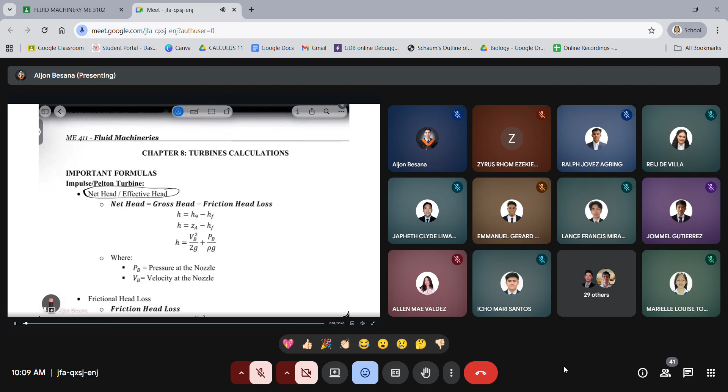For our impulse turbine, we have here our important formulas, just like the net head, the friction head, and the other formulas specifically that we are going to use for impulse turbine. First, let us talk about our net head. When we say net head, it is simply the summation or the totality of all the energy that we can harness. So if the term is the energy that we could harness, it means that it is the total energy minus all the losses. So when we say net head, it is the only energy that we could harness using our turbines. Again, when we are talking about turbines, it is not anymore imparting energy, but it is more on harnessing energy from our fluid.

Okay, so when we say net head, again, that is the totality of head that we can harness or the totality of energy that we can harness from the fluid. So it is simply equal to our gross head minus our frictional head loss. So first, let us define what is gross head. So if you can see here in our diagram, gross head is represented by big letter H with a subscript G.

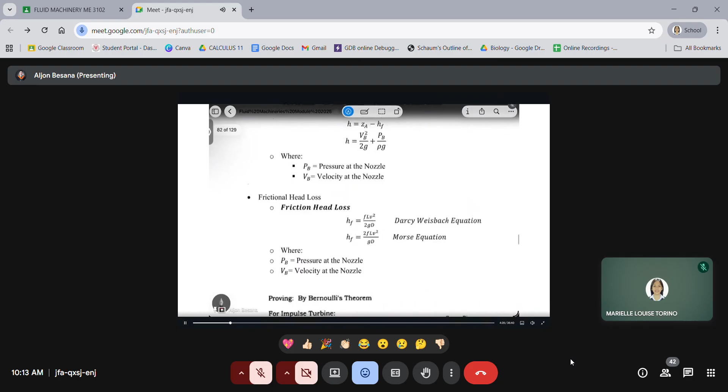So pag sinabi nating friction head, as the water travels from the reservoir down that long pipe, kita nyo tong long pipe, this is what we call our penstock. Pag sinabi po nating penstock, siya po yung nag-guide sa ating fluid towards our turbine. And this penstock, again, is a pipe or a canal or a channel.

And when it is another solid surface having interaction with our fluid, therefore there is a fluid-solid interaction. The surface of the solid is also affecting the flow of our fluid. Friction means it is the resisting force.

Therefore, as the fluid flows through this penstock, meron po tayong nagiging friction or resisting force, and that is considered as losses. So this friction creates the drag and resistance that causes our fluid to lose energy.

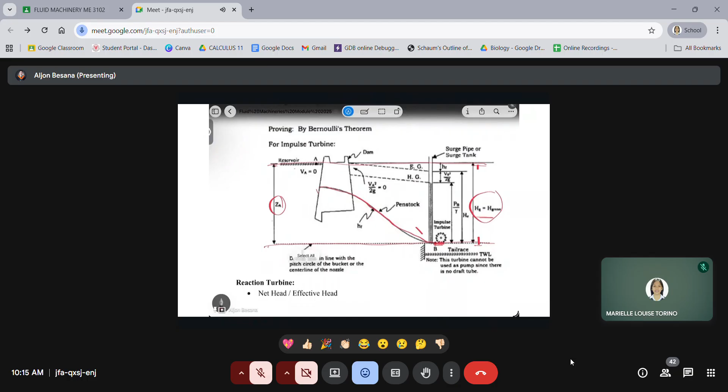Again, katulad ng discussion natin before, we have two formulas. The first one is the Darcy-Weisbach equation and the other one is the Morse equation. Kapag po yan ay less than 2, then let us use the Darcy-Weisbach equation, which is simply HF is equal to FLV squared all over 2GD. Pag ang ating value ng F or yung friction factor natin, ang leading zero niya ay 2 lang po or mas kaunti pa sa 2.

But when the value of the friction factor, the leading zero, is 3 or more, then we are going to use the Morse equation, which we have HF is equal to FLV squared over GD, and the multiplier 2 ay nadoon po sa taas. And what do we call this factor? This is now what we call our fanning friction factor.

Okay? So, continuing. So, we now know the gross head and we now know our frictional head loss. So, what is net head naman po? When we say net head, that is the total energy that can only be harnessed from the fluid. Yan lang yung mismong tubo mo, kumbaga. Yan yung tinubo mo. Yan lamang po. And how do we calculate it? It is simply HNet is equal to our gross head minus our frictional head loss.

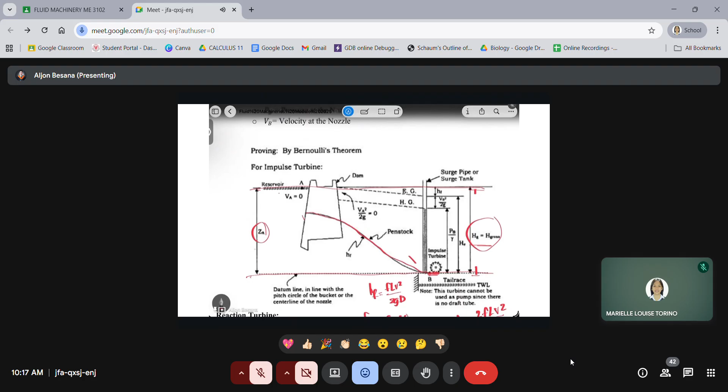But then again, take note, na si HG ay equal daw po kay ZA, di ba, nakita natin doon sa diagram. And going back to our diagram and using our Bernoulli's theorem to prove that our equation is correct. So I have our Bernoulli from our reservoir going to our datum or tail race. So I have ZA plus velocity A squared all over 2G plus pressure A all over gamma is equal to ZB plus velocity B squared all over 2G plus pressure B all over gamma.

First, if you could see on our diagram, the velocity at the reservoir is equal to 0. Oh no, sir. Bakit po? Kasi yung atin pong reservoir is considered an open area or a very large area. Having that very large area, the velocity is considered to be equal to 0 theoretically. Therefore, yung VA squared over 2G natin ay equal kay 0.

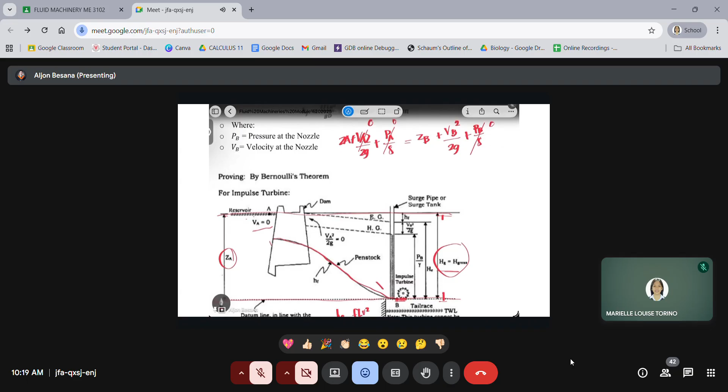Next, we also have our reservoir open to the atmosphere. Ay di ba dapat ang gagamitin natin lagi dito ay gauge pressure? Therefore, ang matitira lang dito ay yung atmospheric pressure or simply ina-assume natin na equal to zero. Kasi may atmospheric pressure din dito and this is also open to the atmosphere, yung PB natin on the other side, kaya naman siya equal din po kay zero.

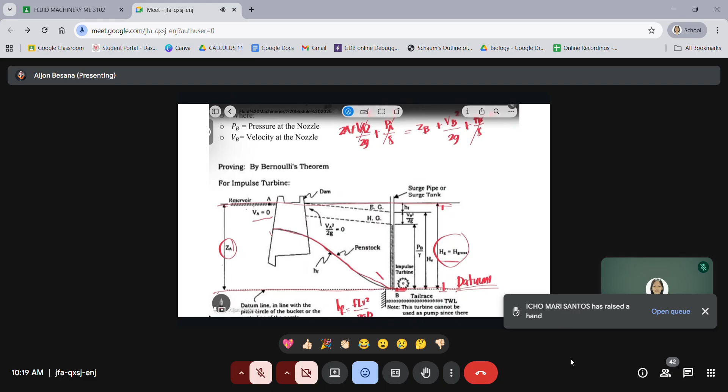Okay? Next po, yung VB natin, that is our tail race... equal to zero. So this is also equal to 0. Ayan. Therefore, yung matitira sa atin ay ZA ay...

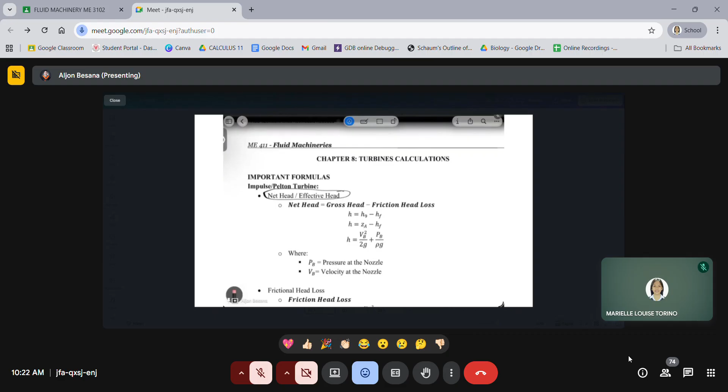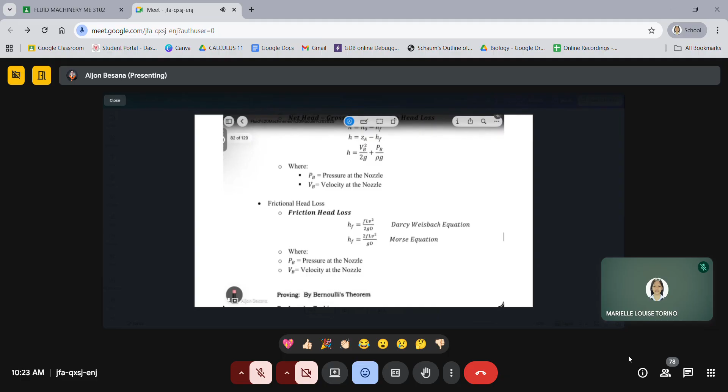So good day everyone. So for today we are going to discuss our chapter number 8, which is turbine calculations. So for our turbine calculations, we have again two types of turbine, our impulse or Pelton turbine and our reaction, or could be called Francis or Kaplan turbine. For our impulse turbine, we have here our important formulas just like the net head, the friction head, and the other formulas specifically that we are going to use for impulse turbine.

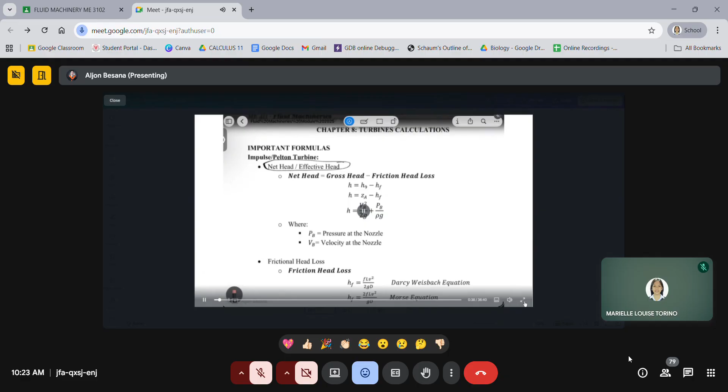First, let us talk about our net head. When we say net head, it is simply the summation or the totality of all the energy that we can harness. So if the term is the energy that we could harness, it means that it is the total energy minus all the losses. So when we say net head, it is the only energy that we could harness using our turbines. Again, when we are talking about turbines, it is not anymore imparting energy, but it is more on harnessing energy from our fluid.

Okay, so when we say net head, again, that is the totality of head that we can harness, or the totality of energy that we can harness from the fluid. So it is simply equal to our gross head minus our frictional head. Again, when we are talking about turbines, it is not anymore imparting energy, but it is more on harnessing energy from our fluid.

Okay, so when we say net head, that is the totality of energy that we can harness from the fluid. So it is simply equal to our gross head minus our frictional head loss. So first, let us define what is gross head. If you can see here in our diagram, gross head is represented by big letter H with a subscript G.

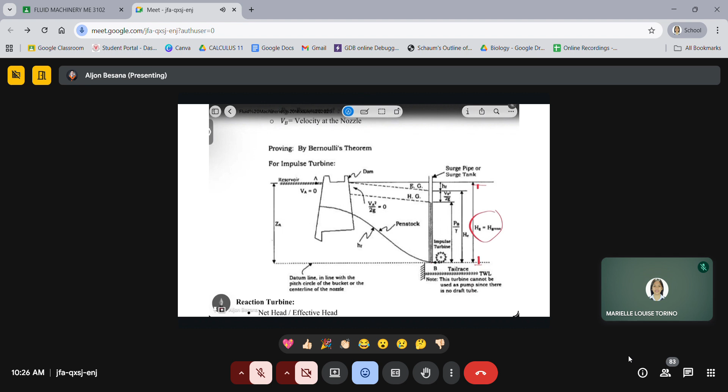Therefore, from our reservoir, the fluid will flow to the datum and directly to the turbine, making the turbine rotate. And the energy from the reservoir going to that datum or going to the tail race, that is what we call gross head. And if you could see here on our diagram, Hg is also equal to our elevation A, which is simply the elevation from our datum to our reservoir. So we could also say that gross head is also our elevation A.

This is the total possible energy we start with. It is the total vertical elevation difference between the water surface in the reservoir, called the headwater, and the center of the turbine nozzle, na nakikita natin dito, yung na doon sa ating datum.

So para mas madali nating i-imagine, kapag sinabi nating gross head, that is the total height kung saan pwede tayo mag-fall. So it is the maximum potential where we could obtain the maximum potential energy as well. But never forget that all energy has its losses.

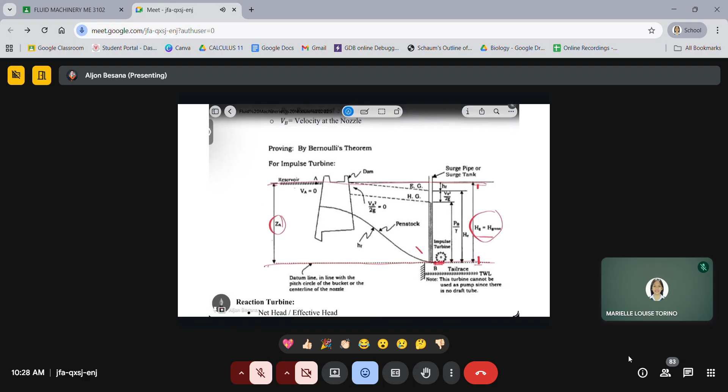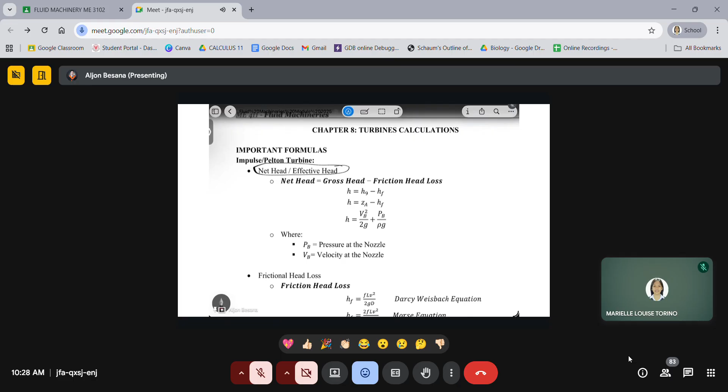So pag sinabi nating friction head, as the water travels from the reservoir down that long pipe, ito yung tinatawag nating long pipe, our term is what we call our penstock. Pag sinabi po nating penstock, siya po yung nag-guide sa ating fluid towards our turbine. And this penstock, again, is a pipe or a canal or a channel.

And when it is another solid surface having interaction with our fluid, there is a fluid-solid interaction. The surface of the solid is also affecting the flow of our fluid. Friction means it is the resisting force. Therefore, as the fluid flows through this penstock, meron po tayong friction or resisting force, and that is considered as losses. So this friction creates drag and resistance that causes our fluid to lose energy.

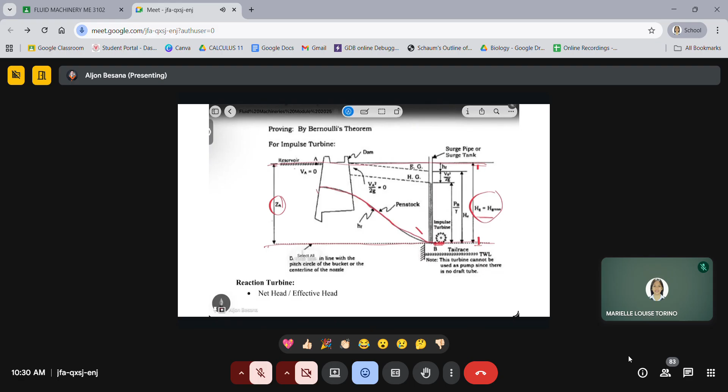Again, like our discussion before, we have two formulas: the Darcy-Weisbach equation and the Morse equation. Kapag po yan ay less than 2-0, let us use the Darcy-Weisbach equation, which is simply hf equals fLV² over 2gD. Pag ang leading zero ng friction factor f ay 2 lang po or mas kaunti pa sa 2.

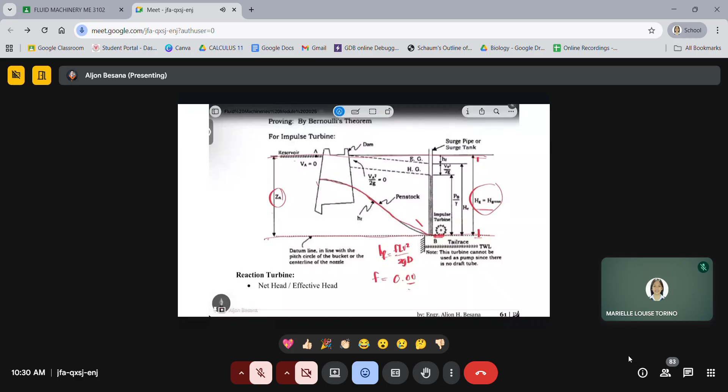But when the leading zeros of the friction factor are 3 or more, then we are going to use the Morse equation, where hf equals 2fLV² over gD, and the multiplier 2 ay nandoon po sa taas. And what do we call this factor? This is what we call our Fanning friction factor.

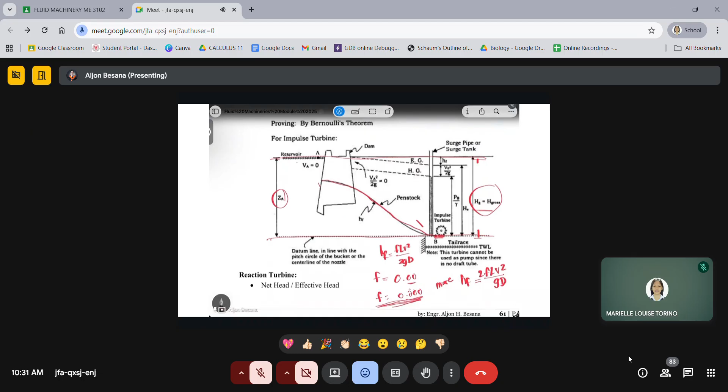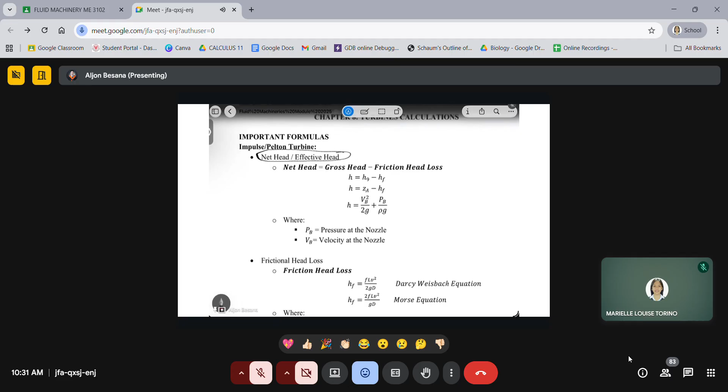Okay? So, continuing. So, we now know the gross head and we now know our frictional head loss. So, what is net head naman po? When we say net head, that is the total energy that can only be harnessed from the fluid. Yan lang yung mismong tubo mo, kumbaga. Yan yung tinubo mo. Yan lamang po. And how do we calculate it? It is simply HNet is equal to our gross head minus our frictional head loss.

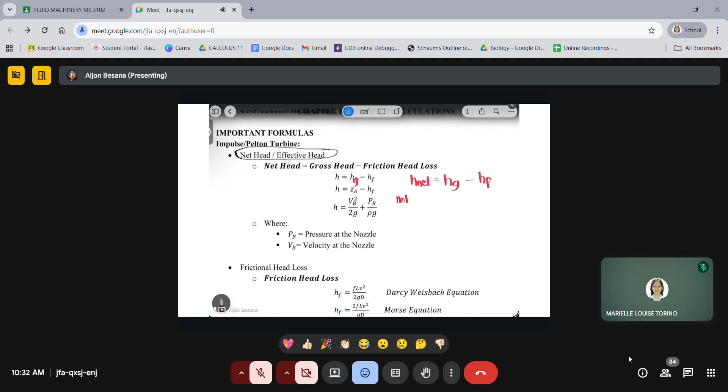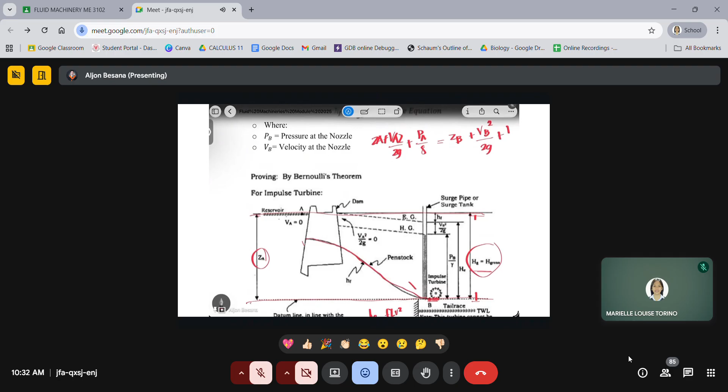But then again, take note, na si HG ay equal daw po kay ZA. Di ba nakita natin doon sa diagram? And going back to our diagram and using our Bernoulli's theorem to prove that our equation is correct. So let's see here. So I have our Bernoulli from our reservoir going to our datum or tail race. So I have ZA plus velocity A squared all over 2G plus pressure A all over gamma is equal to ZB plus velocity B squared all over 2G plus pressure B all over gamma.

First, if you could see on our diagram, the velocity at the reservoir is equal to 0. Oh no, sir. Bakit po? Kasi yung atin pong reservoir, that is considered an open area or a very large area. Having that very large area, the velocity is considered to be equal to 0 theoretically. Therefore, yung VA squared over 2G natin ay equal kay 0.

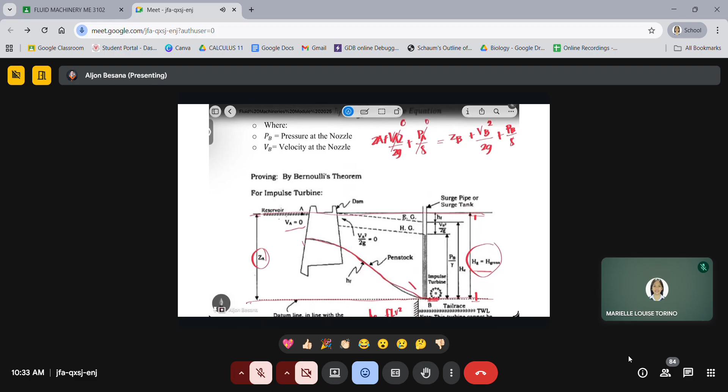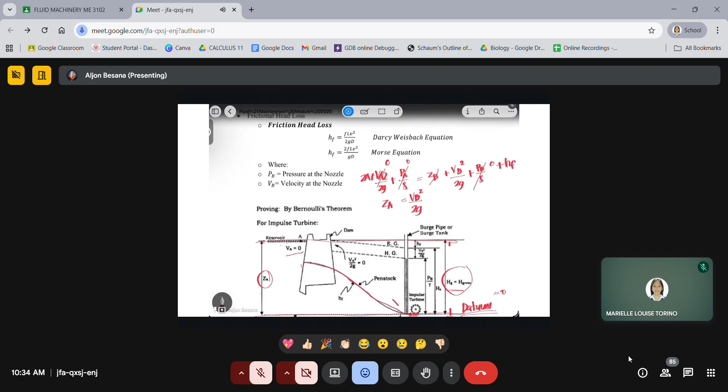Okay? Next po, yung ZB natin, that is our tail race or simply what we call as our datum. And when we say datum, the elevation is equal to 0. So this is also equal to 0. Therefore, yung matitira sa atin ay ZA ay equal na lang po kay VB squared all over 2G. Pero tatandaan, meron tayo laging additional dito, head loss. So plus our HF. So having this equation, balik tayo dun sa ating given kanina. So take note, HG is equal to ZA. Therefore, HG is equal to VB squared all over 2G plus HF.

So computing the Hnet, substitute natin yung value ng ating Hg. So we have VB squared all over 2G plus HF minus our HF. So that will be equal to Hnet is equal to VB squared over 2G. That is one option or one situation kung saan inassume natin na si pressure at the streamline or tail race is also equal to 0.

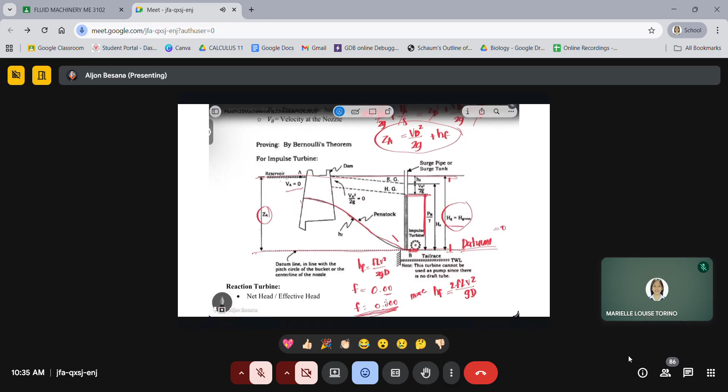Pero kung si tail race ay mayroong pressure from a certain height po, meron tayong i-consider na pressure or may binigay na pressure. Therefore, yung formula natin, meron pa dapat tayo ditong plus PB over gamma. At dito, pagdating sa equation, this will be Hnet is equal to VB squared all over 2G plus PB over gamma. And this is our formula for Pelton or simply our Hnet formula.

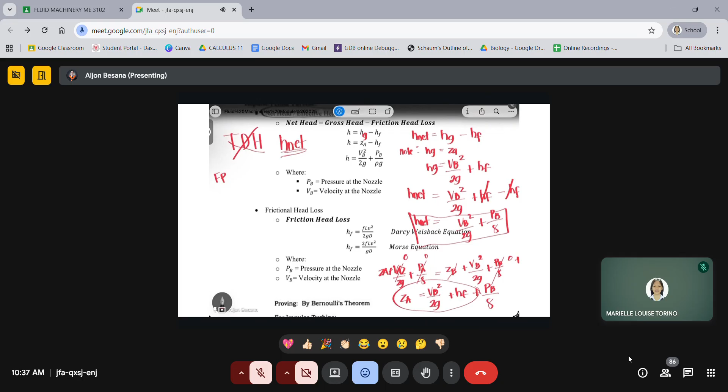For example, pag kumuha tayo ng fluid power or kumuha tayo ng brake power, yung mga H na ginagamit natin, that will be the Hnet na ngayon. Hindi na yung TDH. Hnet na po tayo ngayon kasi tapos na daw yung TDH. Okay. So, that is for our impulse or Pelton turbine. So, for better understanding, let's try solving a sample problem po.

Okay. So, let's try solving problem number 14. A Pelton turbine has 30-meter head, friction loss of 4.5 meter. The coefficient of friction head loss is 0.00093. Therefore, we use the Morse equation. The penstock length of 80 meter. What is the penstock diameter? Determine the penstock efficiency. So, paano nga ba natin i-calculate muna yung ating penstock diameter?

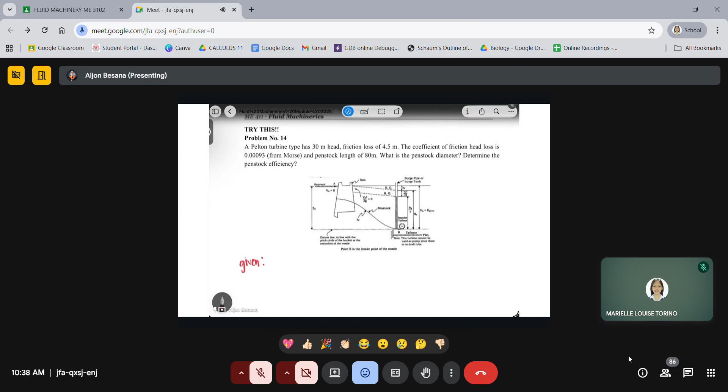So, si penstock diameter ay yung diameter ng tubo. So, doon muna tayo sa given po. So, given, we have here our head. The Pelton has 30-meter head. Ibig sabihin, meron agad tayong ZA or simply yung HG na equal kay 30 meters. Binigay agad yung friction loss. Friction loss daw po is equal to 4.5 meters.

Then we are provided with our Fanning friction factor equal to 0.00093. Also, we have the penstock length that is equal to 80 meters. Then we are asked for our penstock diameter and also our efficiency of the penstock.

So let us solve. If you could remember the formula of our friction factor, we have 2FLV squared all over gD. Dito makukuha natin yung diameter, ito yung ating diameter na hinahanap po. So to obtain that diameter, we could simply have our friction loss, head loss, then use this formula. We already have our friction factor, we have our length, but we don't have our velocity. Yun lang yung hahanapin natin.

And how can we obtain that velocity? So anong pwede natin gamitin? We could use Torricelli's equation, where velocity is equal to the square root of 2gh. Sir, anong h? Diba sabi ni sir, pag turbine, h net na po yung ating gagamitin. So let's first calculate for our h net. H net is simply 30 meters minus 4.5 meters, which is equal to 25.5 meters. Am I correct?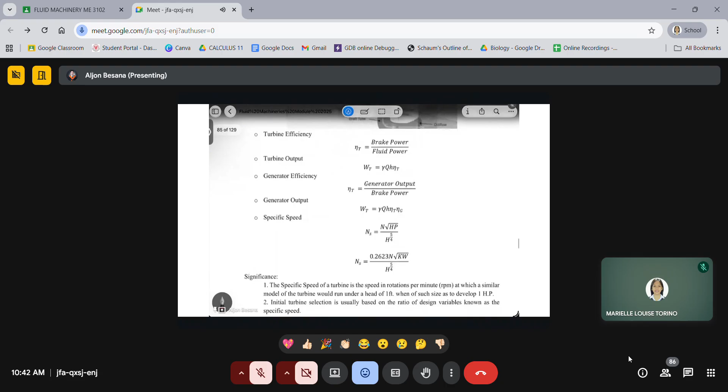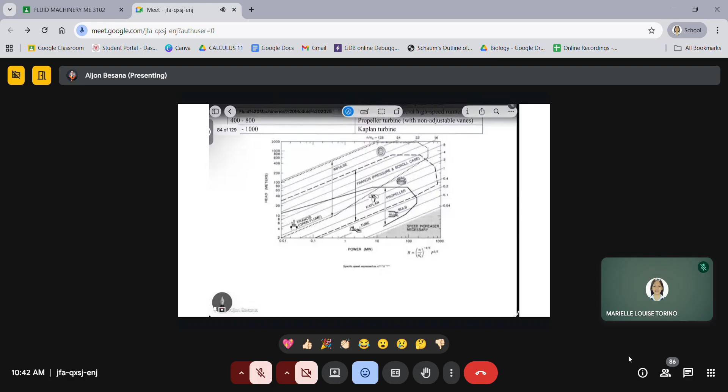Ganun lang. And calculating the penstock efficiency, here we are provided a formula for penstock efficiency, pero on the later part of the discussion, pero we could already use. Penstock efficiency is simply equal to our net head divided by our gross head. Dito madali lang naman po kuhanin. Ang ating net head is equal to 25.5 meters and gross head natin is equal to 30 meters. So 25.5 divided by 30, meron tayo pong 0.85 or simply 85% as our penstock efficiency.

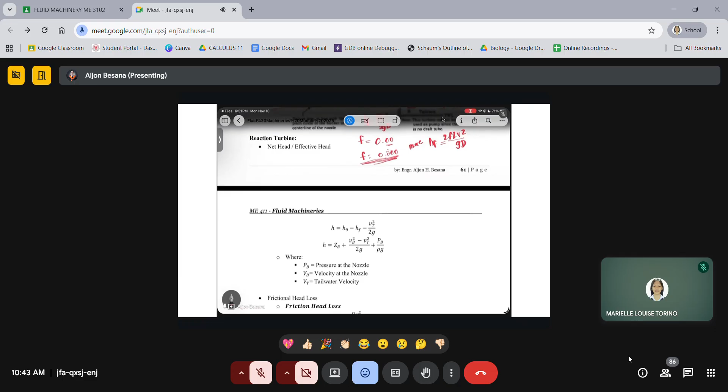Alright, so okay tayo with our Pelton turbine or simply our impulse turbine. So let's now proceed po with our reaction turbine. Ang pinakaiba lang pagdating kay reaction turbine, kung maalala nyo pag sinabi nating impulse, velocity lang yung kino-consider natin. Pagdating kay reaction, there is also the pressure. So for our reaction turbine, we also have our net head. Net head is still equal to gross head minus HF.

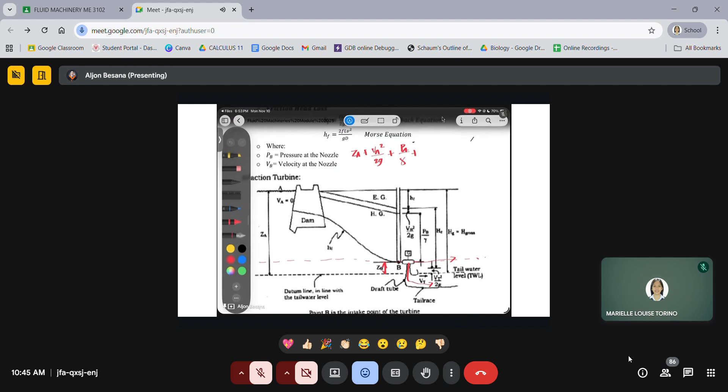Okay, so having this said, let's try again Bernoulli's equation using this diagram. So we have ZA plus VA squared all over 2g plus PA all over gamma is equal to ZB plus VB squared all over 2g plus PB all over gamma. Then meron tayong idadagdag na tail race po, kasi may binabaan pa. So plus yung velocity ng tail race squared all over 2g plus yung ating HF. Again, VA natin is equal to 0.

Velocity A is equal to 0. Meron tayong velocity B dito provided. Yung pressure A natin is still equal to 0 pero dito meron tayong value ulit ng pressure B. Then yung ZB natin, 'di ba kanina dapat 0 'yon, kaso yung atin pong datum ay mayroon na pong pinagbaguhan. Nagbago tayo or magkaiba na po yung datum sa pinakailalim. Therefore, meron din tayo ngayong value ng ZB. Then for our pressure B, meron din. Then yung ating tinatawag na tail race velocity, yung nadagdag, at saka yung ating HF.

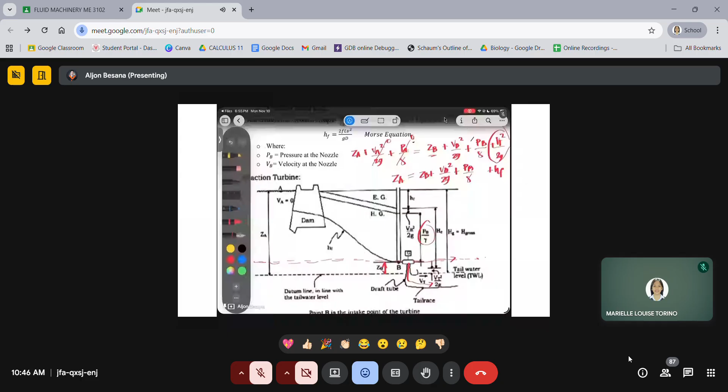Therefore, si ZA, ang matitira na lang po ay si ZB plus VB squared all over 2G plus PB all over fish plus VT squared all over 2G plus our HF. So substitute natin dun sa ating HNet formula, which HNet is equal to HG minus HF, at si HG natin ay ito nga yung value po natin na equal kay ZA.

So note again dito, ZA is equal to HG. Delay lang po yung sulat natin. So HG, so we have HNet is equal to ZB, plus, ay pala dapat ay minus dahil siya ay bumaba from the datum. So itama ko lang po dito, ito ay minus po dapat. Pakalaki naman ng eraser na yun. Ito ay minus po dapat, dahil siya po ay pababa mula doon sa ating datum. So bumawas pa po ulit siya sa energy, para kumbaga ay tatlong equation niya.

Plus yung atin pong VB squared over 2G, minus VT squared all over 2G, plus PB, ang bagal, all over fish. Yung atin pong HF, positive dito, negative dito, kaya siya ay mawawala na. And this is our equation for our reaction turbine.

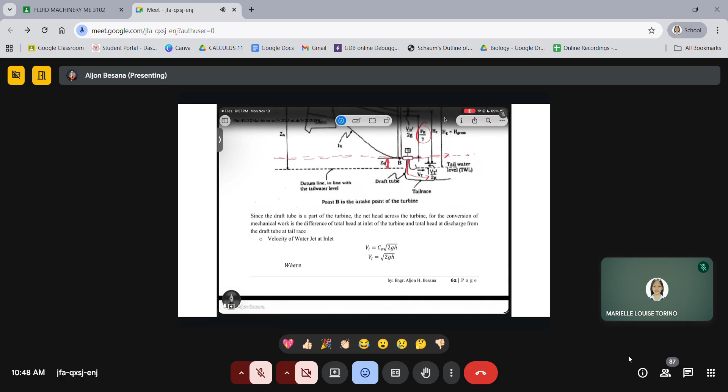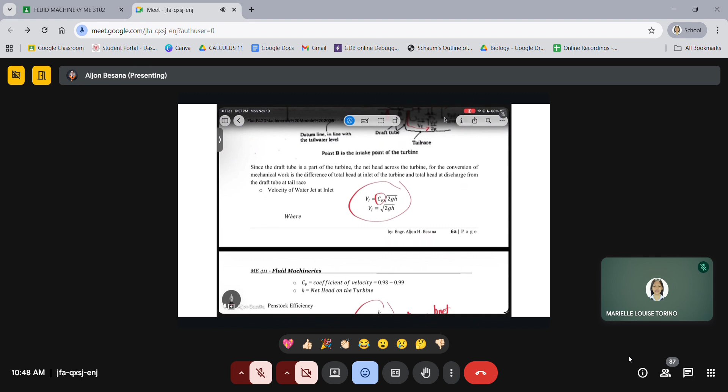So sa inlet natin, ang ginagamit natin, Torricelli lang, kapag po may CV, pwedeng gamitan ng coefficient of velocity or simply ginagawa lang naman po yan as 1, or equal to square root ng 2GH. Penstock efficiency, yung pinag-usapan natin kanina doon sa ating sample problem, sa impulse turbine, which is simply Hnet all over Hg.

Pag fluid, ito na yung sinasabi ni sir na yung mga formula natin sa pump, the same lang pagdating natin dito kay turbine. Kasi katulad ng fluid power natin, fish, Q, H. Pero ang kaibahan lang, di ba dati, fish Q, TDH. Ito ngayon ni fish Q, Hnet po. Para hindi kayo malito, that is fish Q, Hnet po.

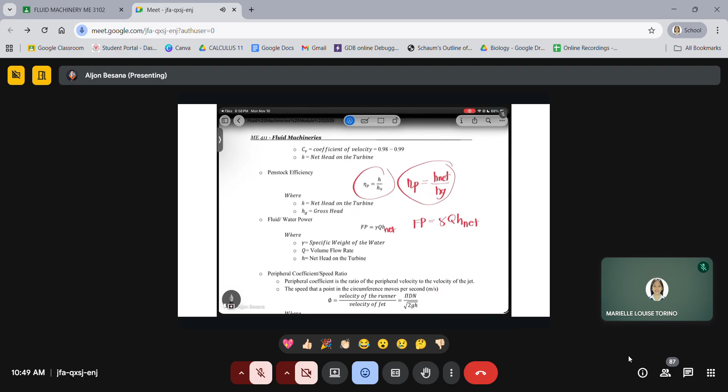At kung sakali man po, hingan tayo ng peripheral coefficient ng atin pong or the speed ratio. So simply, the speed ratio, itong speed ratio, gagamitin naman natin in the calculation of our velocity triangle. So the speed ratio lang po is simply pi dn all over square root ng ating 2GH or the velocity. So the peripheral coefficient is the ratio of the peripheral velocity to the velocity of the jet. The speed that a point in the circumference move per second. So paano siya nagro-rotate in unit of second?

At kung mapapansin nyo, si pi dn parang conversion lang siya ng speed or rotation, saan nga natin ginamit dati ang pi dn? Sa 2 pi dn. Torque, no? Yan, pwede doon. So ito naman ay pag kinukuha natin yung peripheral coefficient, so pi dn all over the square root ng 2GH.

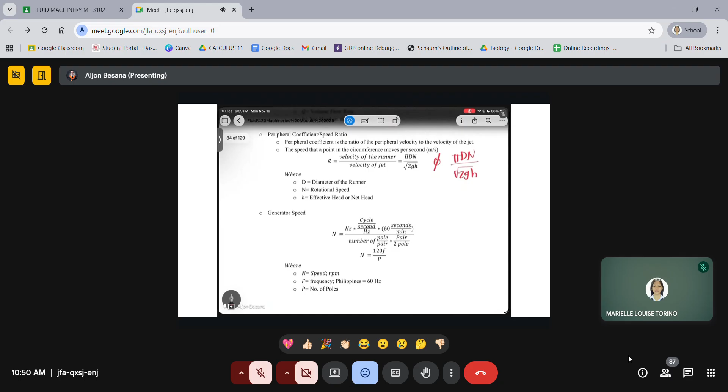For our generator speed naman, ari po yung ating naging derivation. So simply 120F all over P. Ano po yung F? Ano po yung P? For our generator speed, ang gagamitin natin para hindi malito, N-gen. N-gen is equal to 120 times yung frequency po natin. So ang gamitin dito ay big letter F para hindi malito sa friction factor. So big letter F denoting that is 60 Hz.

So, we also have our turbine efficiency.

So, ngayon naman po, pabaliktad tayo kumpara sa ating pump. Turbine efficiency ay brake power over fluid power, so BP over FP. Paano nang andar niyan?

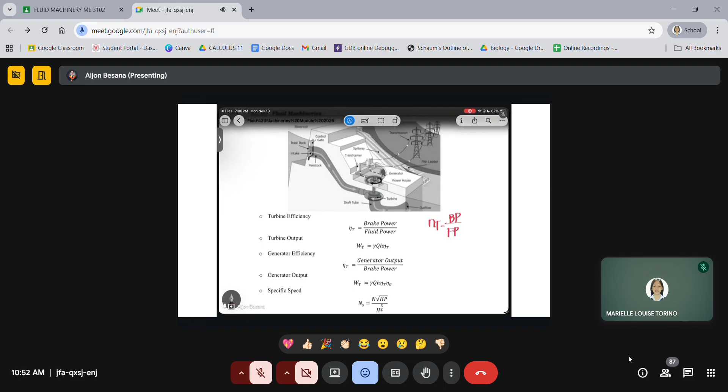Yung tubig natin, FP, dadaan sa ating turbine, BP, lalabas sa turbine, MP. Ibig sabihin, pag ang hinahanap natin ay turbine efficiency, it is output, yung BP natin, over input na fluid power natin. And how do we calculate the turbine output?

Turbine output in terms of power, power pa rin. Ang power naman po natin, that is gamma Q Hnet multiply to turbine efficiency. Okay? So same pa rin naman po, Hnet lang at minultiply lang natin ng turbine efficiency.

Paano naman po yung generator efficiency? Generator or simply yung MP. Pagdating dito, sa halip na MP, ang nagiging GP na po siya, or the generator output or power. So GO na lang para hindi malito, naka-output. So GO, ito na lang po ang pinag-uusapan natin.

So efficiency po ng ating generator is equal to output. Anong output? That is the generator output all over yung input natin na brake power. Output all over input lamang po. Para naman makuha yung power po o yung generator output in terms of power, yung atin kaninang turbine output, multiplyan mo lang ng generator efficiency.

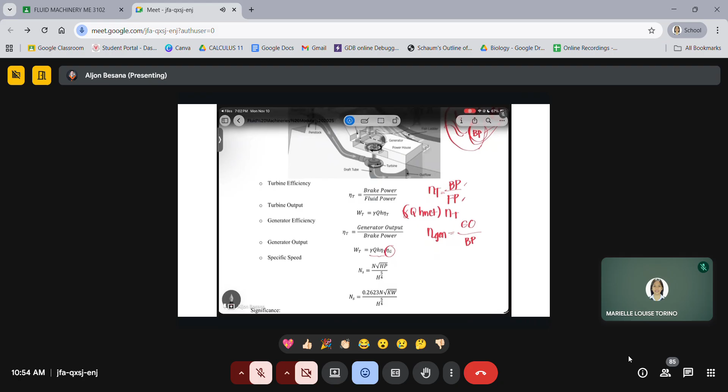Again, specific speed, the same formula pa rin naman po, walang pagbabago. The specific speed of the turbine is the speed of rotation per minute at which a similar model of the turbine would run under a head of 1 feet when such size develops 1 HP. Initial turbine selection is usually based on the ratio of the design variables known as the specific speed. And specific speed will predict information about the performance of a turbine.

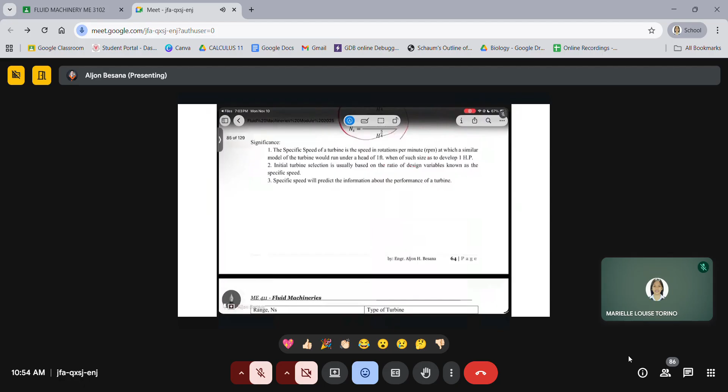So for us to better appreciate, let's first have our sample problem. Pero bago yan, pinakita lang sa atin dito yung iba't ibang range ng ating specific speed.

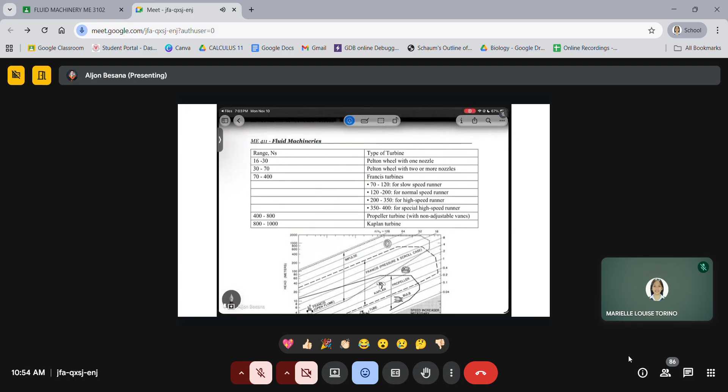Pag ang specific speed na na-compute ay 16 to 30, then that is a Pelton or impulse turbine. Pag 30 to 70 is still Pelton pero mas marami siyang nozzles o mas maraming blade. Pag 70 to 400, yan na yung tinatawag nating Francis turbine, na merong pag 70 to 120, slow runner; pag 120 to 200, normal speed; pag 200 to 350 is high speed.

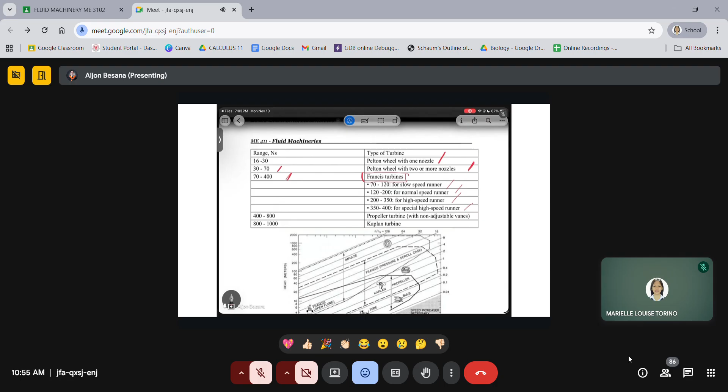At pag 350 to 400 is a special high speed runner naman po. Pag siya po ay umabot ng 400 to 800, ang tawag na natin doon ay propeller turbine. At kapag 800 to 1,000 ang specific speed niya, then that is Kaplan turbine. So this is a graph representing each type of turbine depending upon their specific speed.

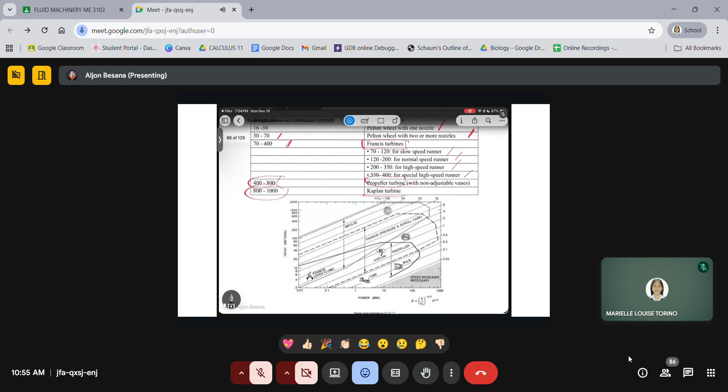Again, specific speed formula: specific speed is equal to our speed multiplied to the square root of our power, all over h raised to 5 over 4, where n is in RPM, power is in HP, head is in feet po. Wag kakalimutan. Okay? Alright, so let's try solving a sample problem po.

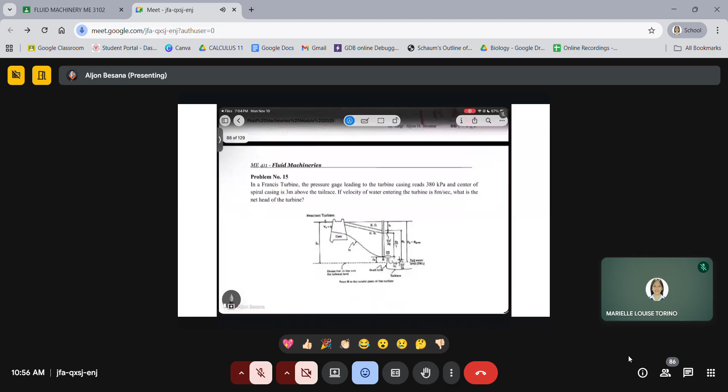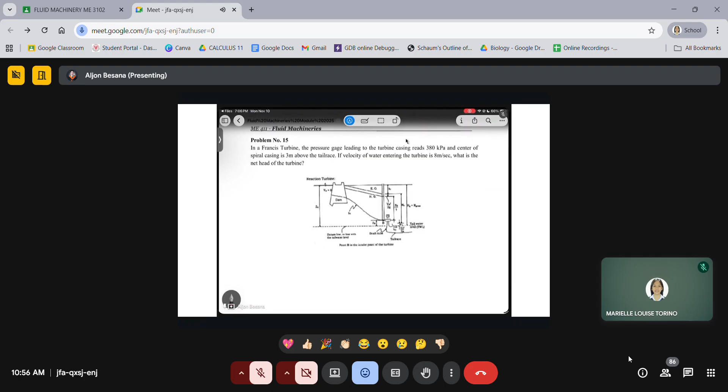Ito, a Francis turbine. Okay, so let's try problem number 15. In a Francis turbine, the pressure gauge leading to the turbine casing reads 380 kilopascal, and the center spiral casing is 3 meters above the tail race. If velocity of the water entering the turbine is 8 meters per second, what is the net head of the turbine?

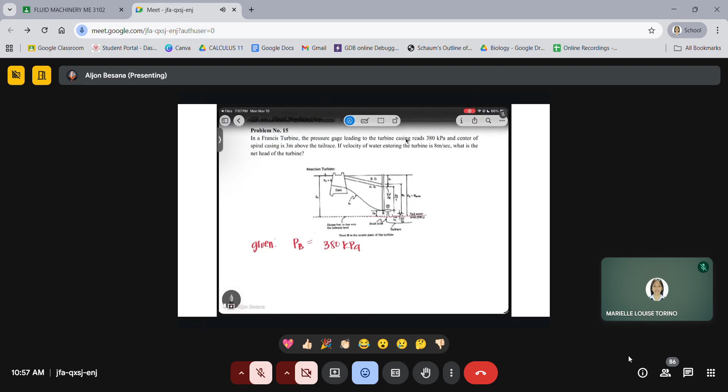Okay, so let's first have our given, mga idol. For our given, we have our pressure at the turbine casing equal to 380 kilo Pascal. Meron din po tayong above the tail race, ZB, equal to 3 meters. And we also have here the velocity of water entering the turbine, yung VB, equal to 8 meters per second.

Okay, so ano ang hinahanap natin? What is the net head? H net po ang ating hinahanap. For our solution, formula po natin ng net head, H net is equal to Hg minus Hf minus Vt squared all over 2g. Sa problem po ba ay may binigay na velocity ng tail race?

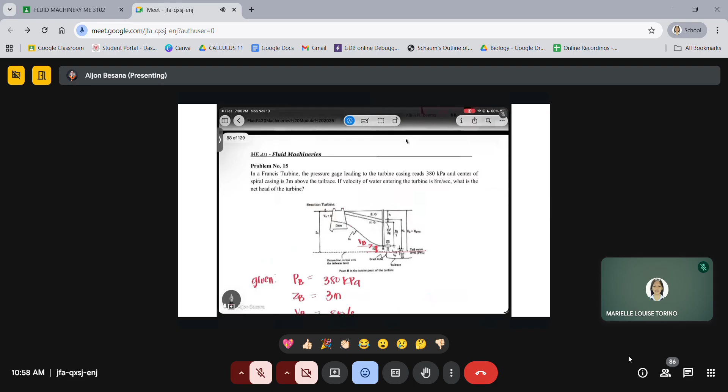Wala po, pag walang binigay, assume Vt is equal to 0. So that is simply Hg minus Hf. At anong formula natin ng Hg minus Hf po? Kapag kay Francis turbine or reaction turbine,

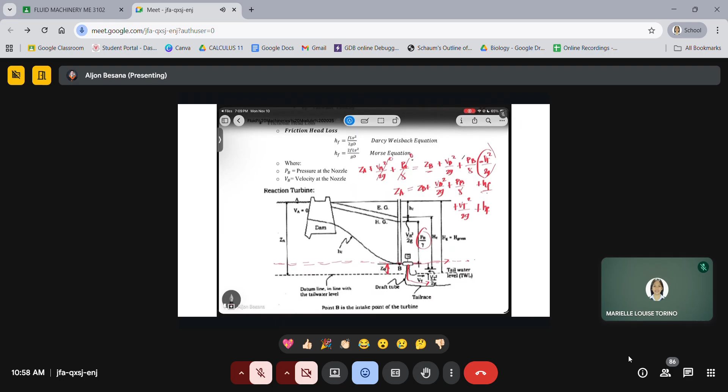Okay, so ang formula po natin natitira ay ZB plus VB squared over 2G plus PB over gamma na lang po. So that will be our formula for our HNet po. Kasi yung VT nga natin daw ay equal to 0. So having that said, so let's put our formula.

HNet is equal to ZB plus VB squared over 2G plus PB all over gamma na lang po. So calculating po, ang ZB natin ay 3 meters plus 8 meters per second squared all over 2 times 9.81 meters per seconds squared, plus 380 kilonewton in every meter squared all over 9.81 kilonewton in every meter cube.

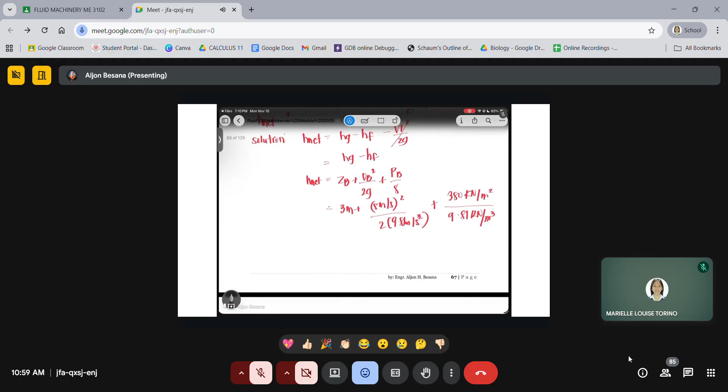So ito ay yung ating specific, yung ating gamma na agad, no? So we have our HNet is simply equal to 44.997 meters po. And this is our answer. Ganun lang kadali kapag Francis turbine ang pinag-uusapan. Wala naman pong komplikasyon, walang problema, walang mahirap. Okay? So that is our reaction and impulse turbine.

Okay, and do you still want to add additional problem po for our at least additional one? Siguro problem number 16, do you want to try po? Let's try solving problem number 16 for an additional problem. Nagets ka po ang ating Francis and impulse turbine? I'm sorry, impulse and reaction turbine. Totoo kay Iko, puro react.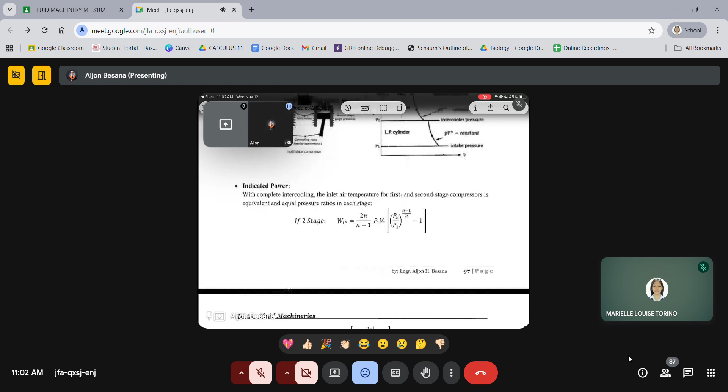Find also the required pitch diameter of the wheel. Dalawa po yung hinahanap sa atin. Yung atin pong specific speed at yung atin pong pitch diameter. So with this, let's have our given first. So for our given, we have our n is equal to or speed na 400 RPM. We also have HNet kasi sinabi sa atin ay net head. So HNet na 1,320, diameter na 6 inches or 0.5 feet, then the CV, the peripheral coefficient, and our specific efficiency of the turbine. We are asked to identify the specific speed and the pitch diameter.

Provided tayo ang formula po natin ng specific speed ng turbine, we have N square root ng power all over H raised to 5 over 4. Ngayon, meron tayong N, meron tayong H or HNet. Ang hinahanap na lang natin ay yung ating HP. So, how can we get that HP? Saan ba natin, anong HP ba tinutukoy dito? This is our turbine power. And how can we obtain the turbine power?

So, turbine power po ay makukuha natin from, si turbine power ay yung atin din tinatawag na brake power. So, paano natin makukuha si brake power? Sabi po natin, brake power is equal to turbine power, which is equal to gamma Q H net multiplied to the turbine efficiency, where gamma Q H net is simply our fluid power. So, dito kitang-kita natin, no, pagdating kay turbine, yung mga TDH natin ng pump, puro H net na po pagdating kay turbine. No. So, substitute lang po natin.

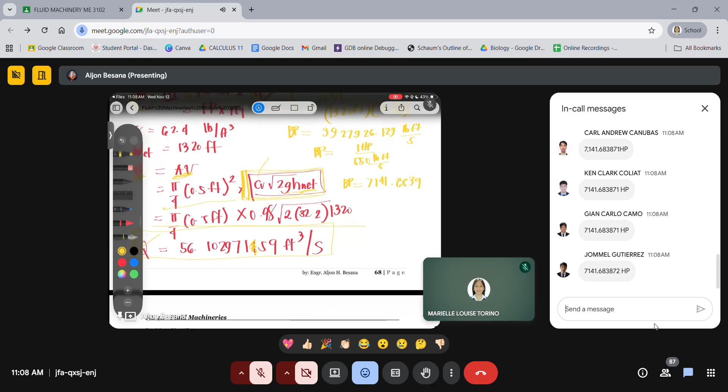7141.6839. Delay lang po yung ating sulat. No, 39 HP po. Therefore, substitute na natin siya sa specific speed. At makuha na natin ang ating specific speed. Substitute lang po tong BP dito. Anong specific speed na makukuha natin ngayon?

Ano makukuha nating specific speed? Substitute lang po dito, given na N with 400 RPM. Yun, galing naman ni Iko. So we have 4.2486. Oops, wala po tayong unit Iko dahil tayo ay specific speed. Tandaan natin, di tayo naglalagay ng unit sa specific speed.

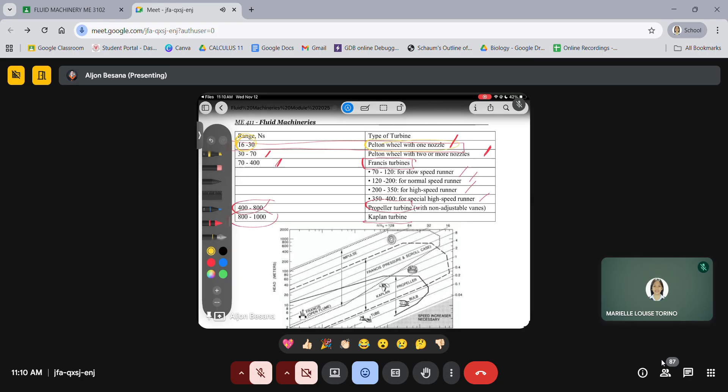And with that, having 4.25 nating specific speed, tingnan natin dun sa ating diagram. Therefore, siya ay isang Pelton wheel with one nozzle na kind ng turbine kasi siya yung pinakamababa. So, pwede nating ma-identify anong type ng turbine yung ginamit, depends on the specific speed provided.

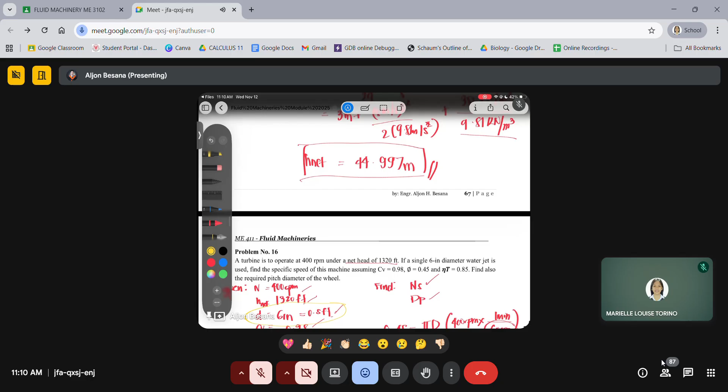Okay na. Then, let's try also calculating for our pitch diameter. So, we have our formula po, gagamitin nating formula dito. Saan ka pwede pong magsulat? Wala nang masulatan.

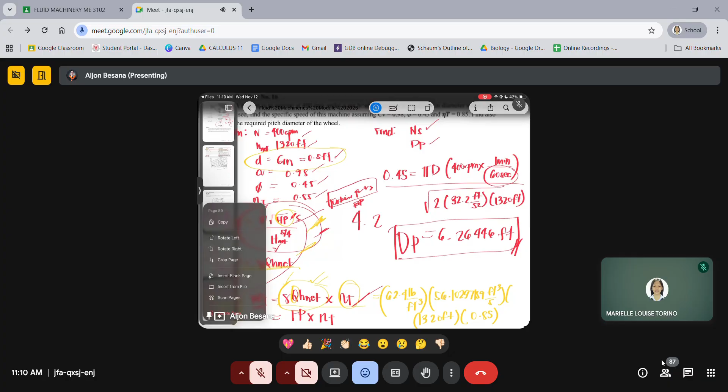For our pitch diameter, we could use the formula ng ating peripheral coefficient. Yung phi is equal to pi DN all over square root ng 2gh po.

Akin, i-photocopy mo na lang. Photocopy mo na lang dun sa ano. Ayun ang typewriting, sir? Oh, meron dyan. Yan galing kay Sir RB. Madali mag-photocopy sa likod.

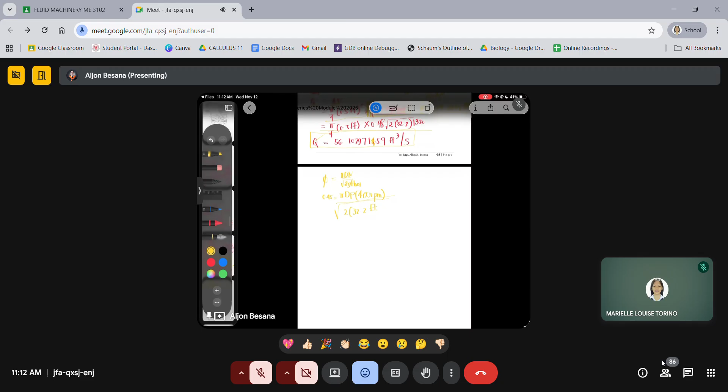So, phi provided na equal daw po siya sa 0.45 nasa given po. Tapos pi times yung diameter, ito yung hinahanap nating DP. Yung N po natin, binigyan tayo kanina: 400 RPM. All over square root ng 2 times 32.2 feet per second squared times 1,320 feet.

So, ano pong value ng DP natin? But before that, make sure na yung unit natin ay homogeneous. Naka-RPM to, naka-per second yung ilalim. Therefore, you should convert either or. In every 1 minute, meron tayong 60 seconds para maging per second na lahat at makancel natin later on. So, what will be the value of our pitch diameter?

Ipipindutin na lang sa calculator mga idol. Bawal yan. Anyone po? Yun, thank you, Kiro. You're the best. So meron po tayong 6.2644622292 feet po. And this is our pitch diameter. Gets naman po ang problem 16.

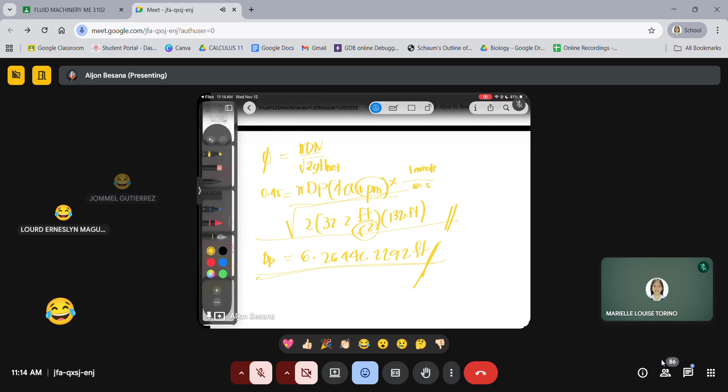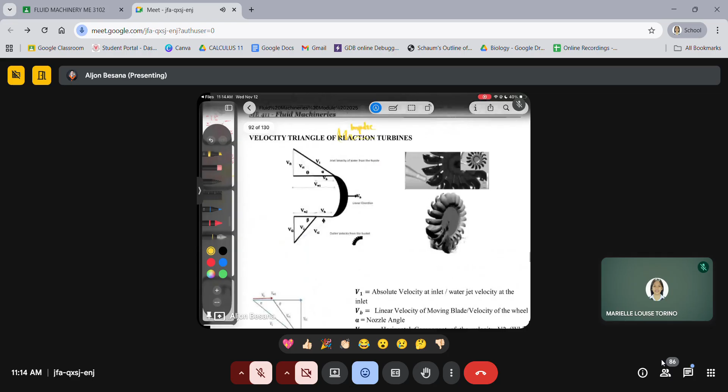And next week po, we will be discussing all about yung ating velocity triangle of impulse turbine and reaction turbine. Ito po ay face-to-face, so mas tututukan nyo na maigi. Isa sa impulse o reaction ang magiging face-to-face, yung isa automatic magiging online.